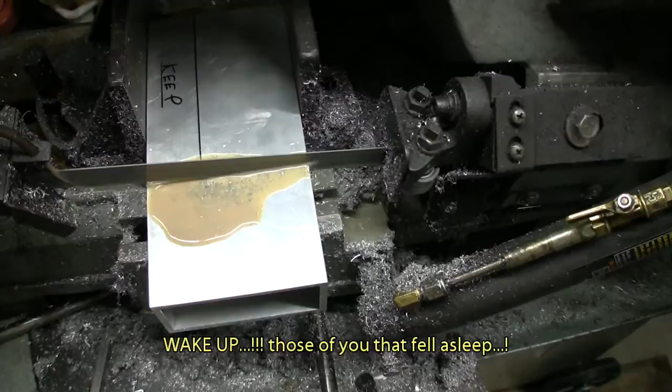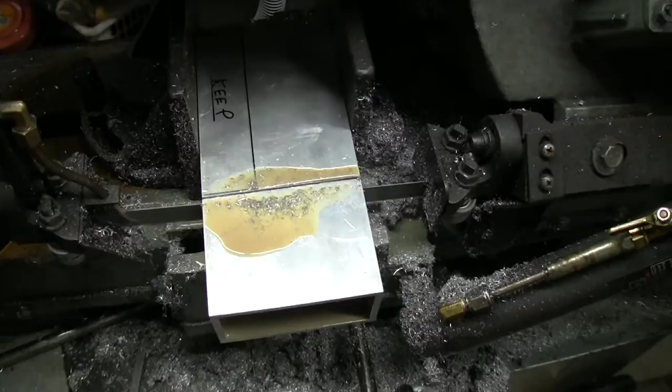So we'll keep going, scooting along on making the crane, let's go to the machines and make some chips fly. This is the front part of the boom that will hold the camera, and that will swivel. It's getting noisy.

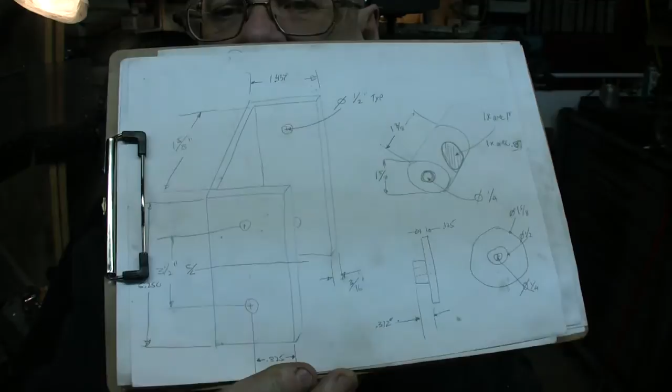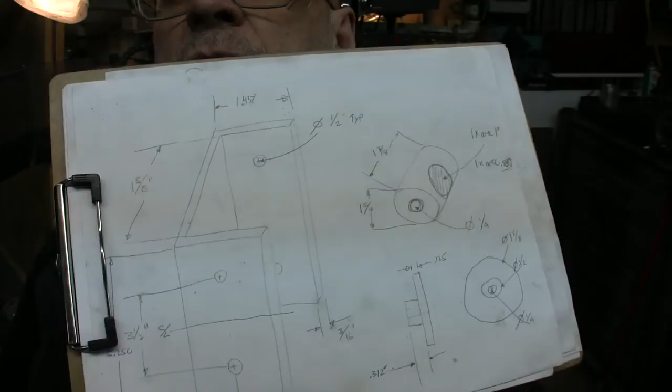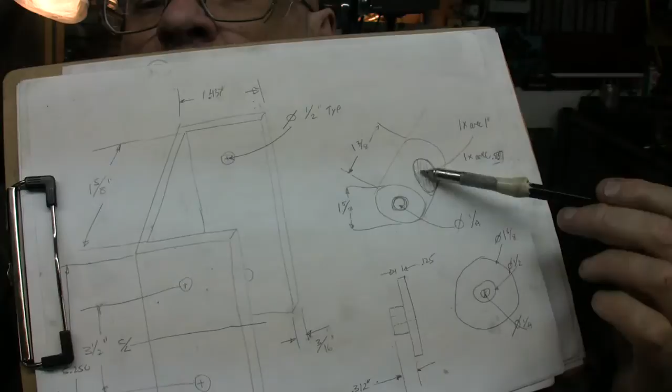We're scooting along pretty good with the project. We've got this channel part of aluminum, 3/16 thick, 1 5/8 width inside clear. We're going to make it 1.437 on the height there. This is going to hold two swivel bushings that accept the two poles - one with a bit of a bigger hole for the upper jib, and the one with the smaller pole will be a little smaller for the lower part.

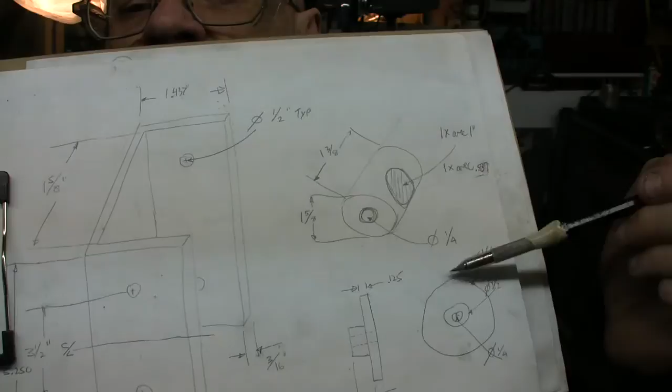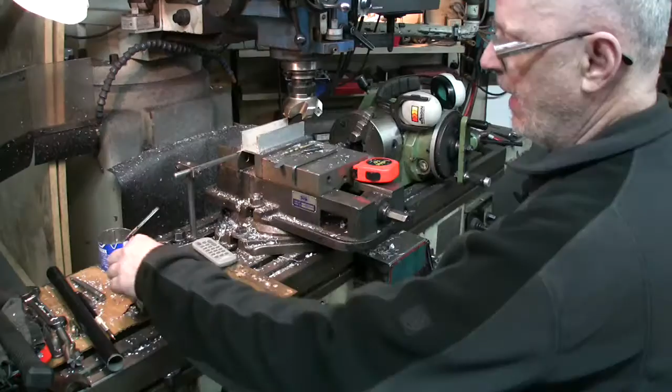On each end we'll have UHMW bushings that are going to accept the 1/4 inch bolts that go right through, and also permit this to slide very nicely inside there for almost a friction-free and squeak-free ease of operation. Had the choice between too small and too big, so I chose the too big.

Cleaning lady just didn't show up again. I guess I'm too cheap to give her a good pay, so she doesn't come when I call her.

We'll flatten the top of this, make it nicely even, two arms in the air like that. Noisy.

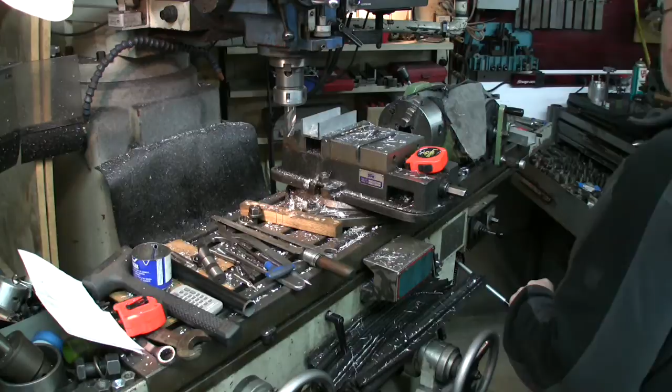I'll take 50, and let's say 60, we'll take it, no problem. And next cut, I'll take the rest, like 25, and the rest shouldn't be a big cut. Okay, let's go for this. A little bit of oil so it doesn't stick.

25, or like, so it's going to be 85. In fact, it's 84. Non-critical. There we go.

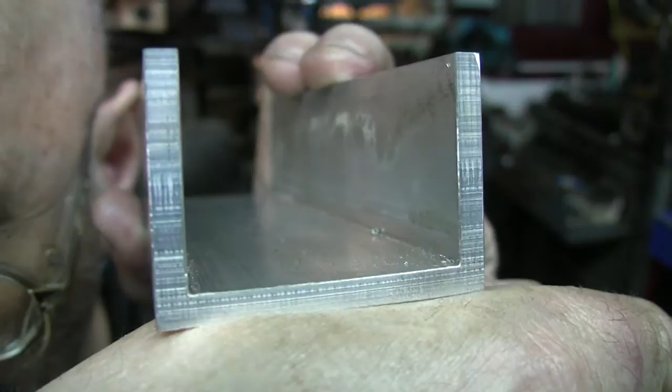Okay, now I think we can see some of the finish it does on the ends. This seems like a reground end mill, it's not exactly as good as a brand new one. There's a little bit of a tiny ripple in there. You can't just really expect a perfect finish with an end mill on the side cutting like that. It's always a little bit of an issue with the finish, but nothing over that - just about up to that is no problem at all. That's about what normally someone gets.

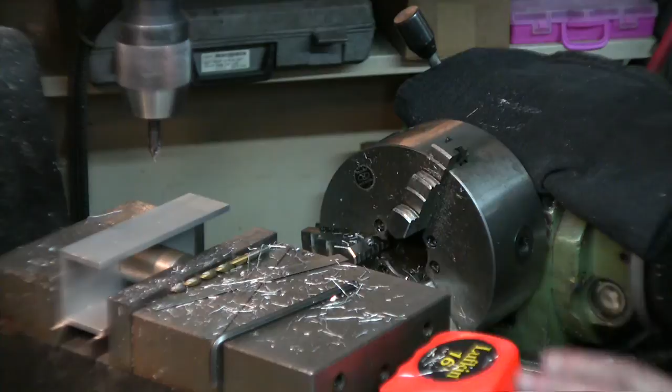We're now ready to make the holes for the pivots to be installed. These holes will have to be reamed half inch, and I already centered myself on the piece. We're working to the center line, and I'm 400 thousandths from the edge there, which will be where I'm making the hole. So I have to go 1 inch. I already centered the arrow. I'm going 1 inch and 750 on either direction.

Okay, 7 - we're right at 750. We're drilling this.

Change the handle, give me a second. Okay. And since I got a DRO, I am not going to worry about finding my position next time. 1.750.

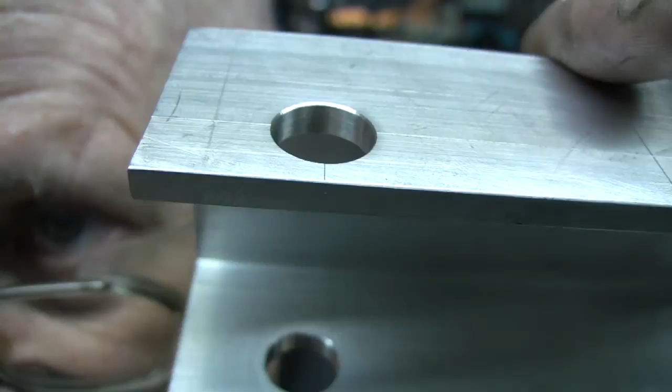That's it, we're in. Out slowly. There we go. And by looking at it, the hole is looking very nice. With the method I showed you, I just kind of deburred the sides a little bit. I think you can see how the reaming inside the hole is clean, no streaks, very regular and cylindrical.

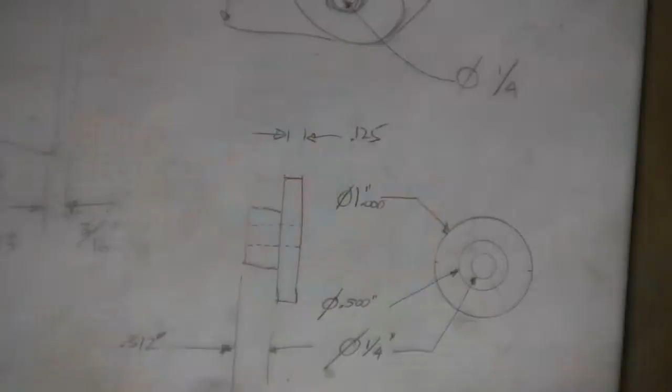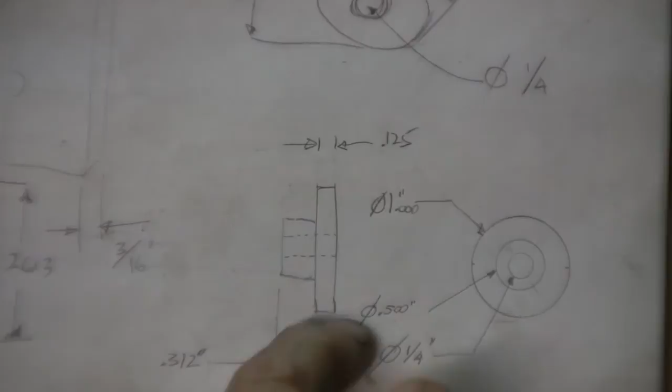Okay, the part we're doing now is this one, 1 inch diameter, half-inch flange in there, 1/4 inch hole inside. Here it's 312 thousandths, this flange, and the overall of the large part is 125 thousandths.

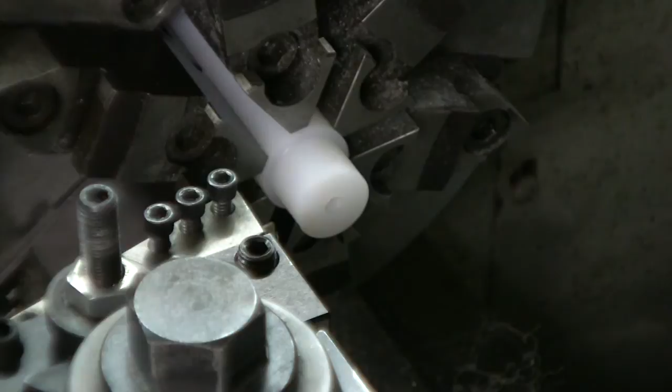I'm not gonna talk too much because I still got problems with the flu and everything, but okay, let's go. It's already been turned down to 1 inch. Now I'm going to get it to 500 thousandths for 312 thousandths deep.

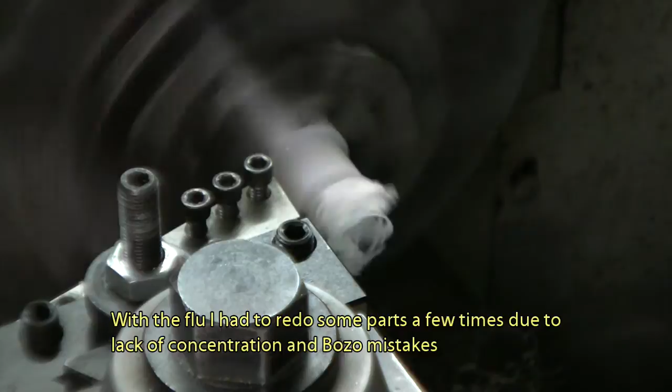Oh, let me just correct something. I'll take a 0. That's better like that. I'll do it in 2 passes.

Okay, we're almost there. 500 now. Okay, I'll put the automatic advance, so it makes a nicer, more regular surface.

There we go, just coming back. You can take humongous cuts with this, and you never, you know, you never tell. I went a little bit too far, so what I'll do, I'll just zero it out and come back 312.

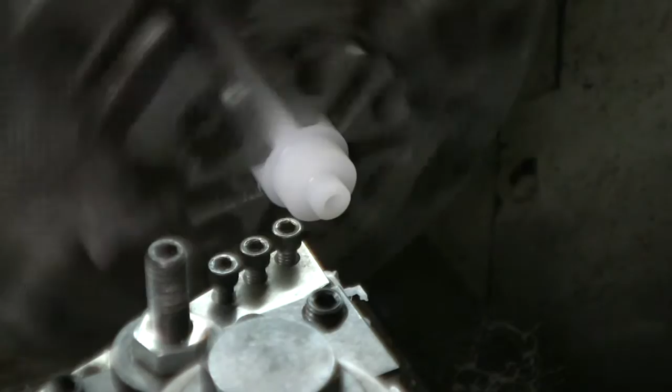And just reface the end, and that's it. It was just a few thousandths, but okay, now we're going to cut with the parting tool.

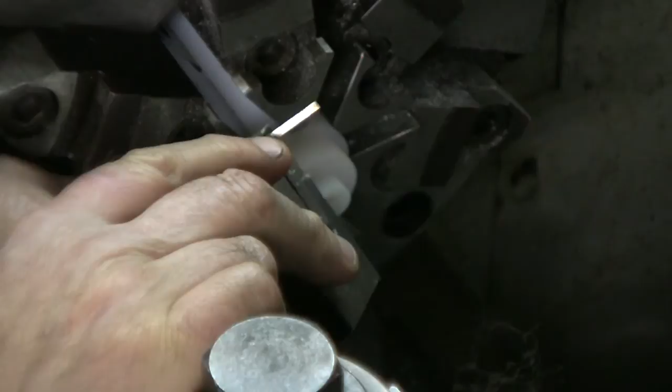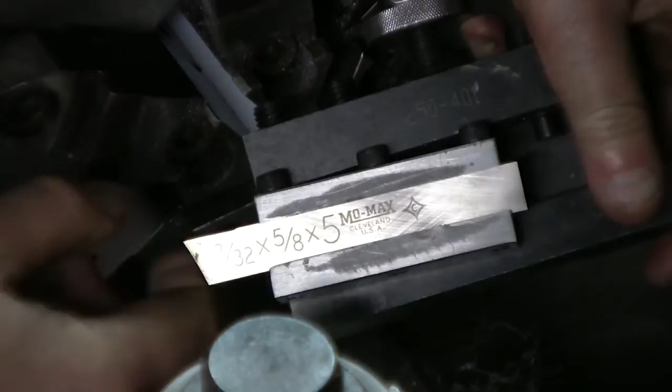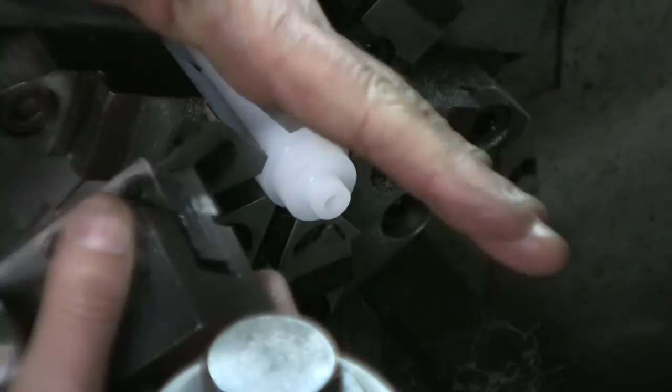This parting tool, I made it. It's a small one, 5/8 wide, and it's 3/32 thick, like a width. Just simple, flat top, except the angle at the end is more like this. It's meant to cut the keeper clean instead of the other part.

I'll just line this up. Get a little piece of something. Zero the DRO. 125. Okay, bloody compressor. I just moved 125 to make the thickness, the flange there.

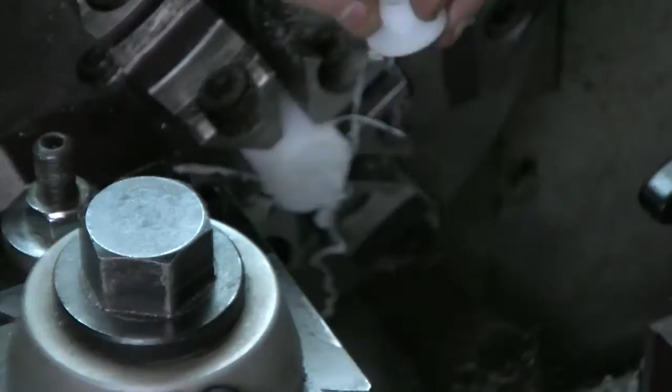It's almost there. Okay, remove the little ribbons, and the part is just a very light dimple there, and all I have to do is take something sharp and cut it just like this here.

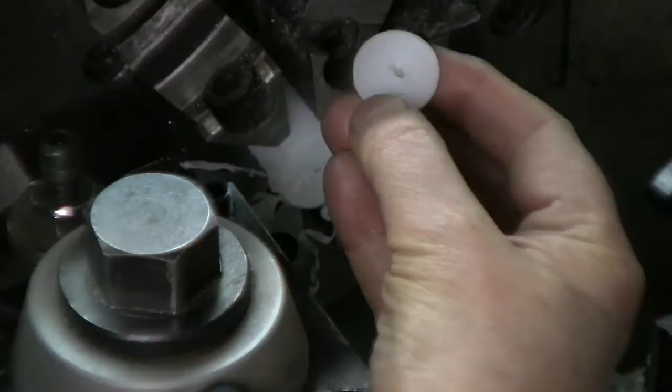And this is a perfect part, nice, super nice finish. And that's one done. I got four like that to do. And where they're going is inside here, and this hole in this part.

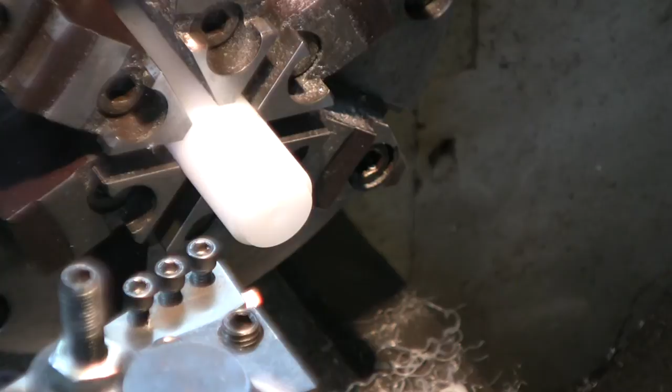Okay, next part is pretty simple. What I want to do is some bushings, 135 thousandths thick, and they're going to be 750 thousandths, 3/4 of an inch in diameter. Now the outside diameter is about an inch and 200, and with the geometry of the knife I got here, we can cut all this in one pass.

And the advance will be, I think it's 8 thousandths per revolution and 375 RPMs. We can cut this in one shot, get about one thousandth precision, and that's going to be the finished diameter in one shot. UHMW, if you have a great cutter, it just cuts like butter.

Okay, 750. And the bigger the cut, the nicer the finish is. Okay, we're gonna go 750 right away.

It's already bored 1/4 of an inch. So we're getting a half-inch cut with that. It's no struggle, not any harder than if I'd be cutting. I could cut even twice that, no problem.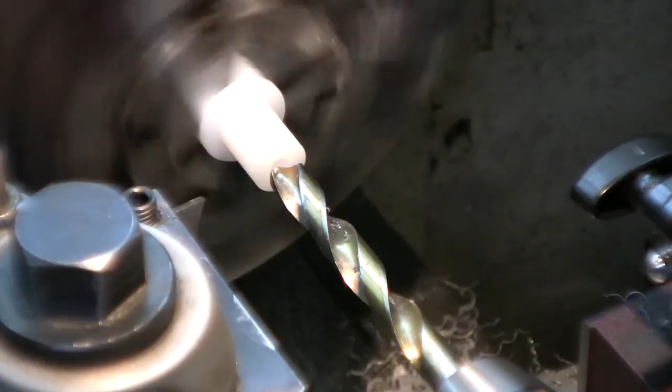Okay, shoulder. Okay, we need a half-inch bore inside. I have to redo the other ones.

With this, you don't have to be afraid of feeding. Lighter cuts will heat up and make more of a mess. And since I'm usually better at eyeballing, we'll keep on eyeballing.

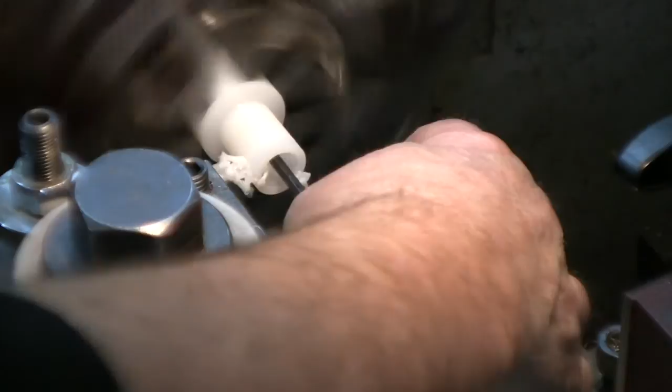Okay, 35. Clean up, just sharp knife.